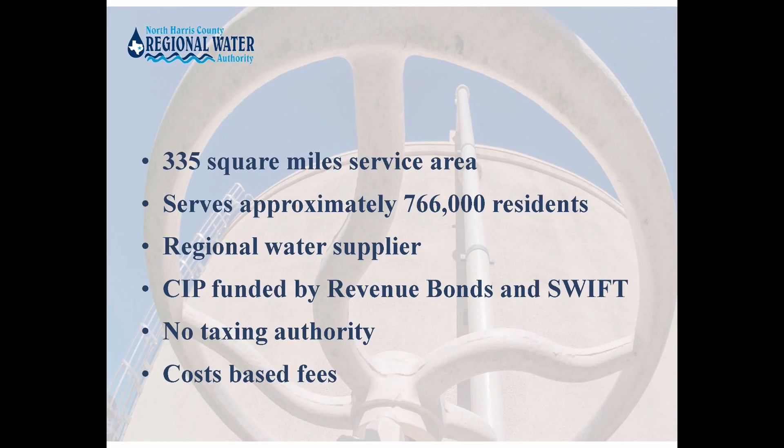So all that said, people still ask why we need you guys. And we didn't ask for this, and we are perfectly fine using our own wells. And now you come in and all of a sudden we start paying, in addition to our mud groundwater pumpage fee, we start paying your fee as well.

Why? Well, have you heard unfunded government mandate? That's why. And the state in 1975 created this entity called Harris-Galveston Subsidence District. That agency is created for the sole purpose of regulating groundwater pumpage. So if you have always used the groundwater, things are gonna change. Well, things already changed since 2010.

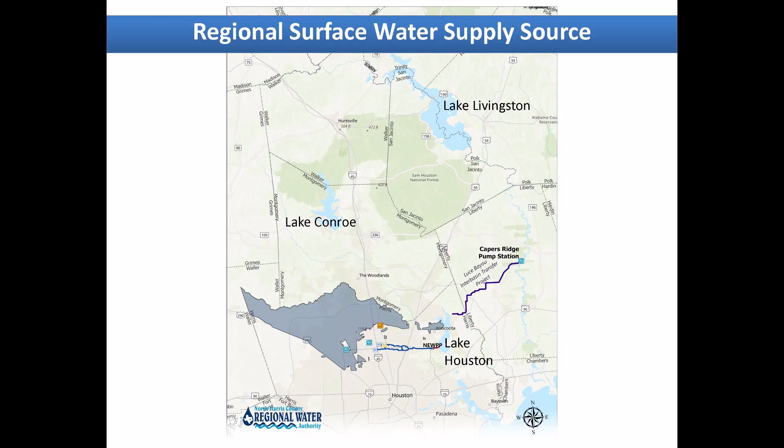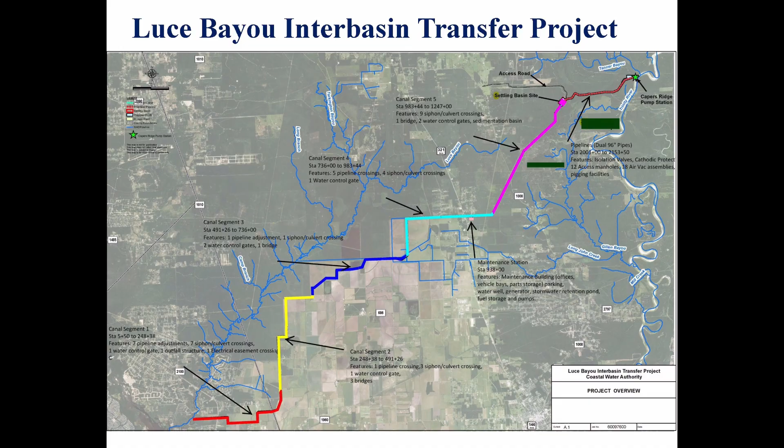The Northeast treatment plant expansion cost is $2 billion.

I also want to point out, if you're talking about people not happy about having to use surface water, imagine the people who live around Lake Houston. They have a beautiful lake, and now all of a sudden this thing is stuck in the middle of the lake, and their boats have to go around outside of what we call the safe zone. So imagine how many unhappy residents there were around Lake Houston when we built this.

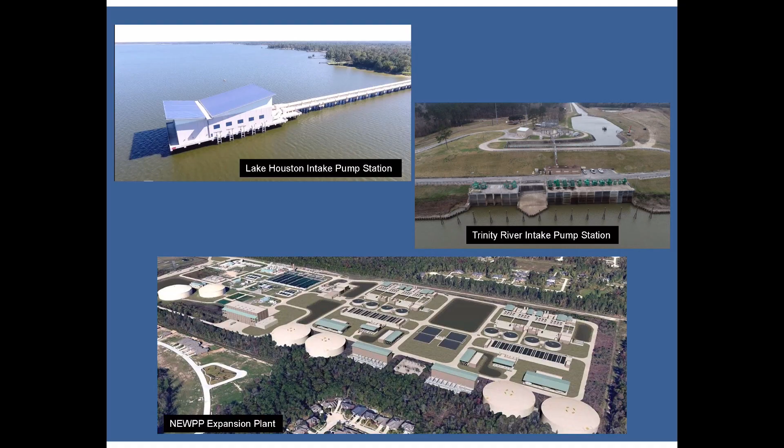Once you build the plant and have the raw water treated, you still have to convey the water from that treatment plant, which is on the east side of Harris County, to where we are, which is the central and west part of Harris County.

So North Harris County partnered with City of Houston to build what we call the Northeast Transmission Line. Remember, there are other partners - the West and North Fort Bend partnered together and built their own separate transmission line. The City, North, and Central built this Northeast transmission line together.

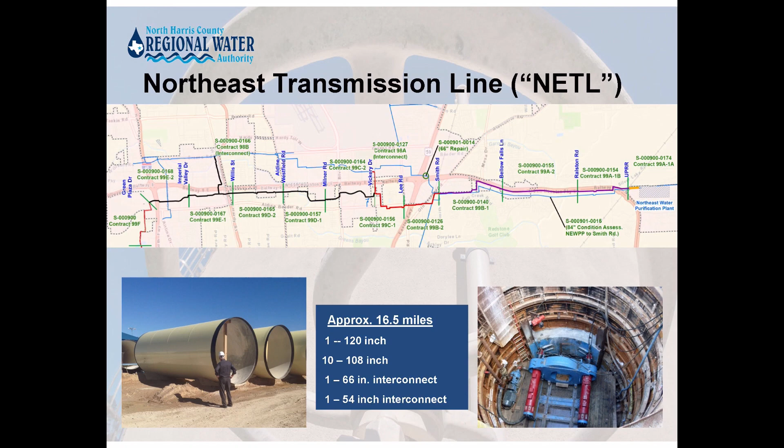There are 13 segments - I don't know if it's large enough for you to see, but the first section is a 120-inch, very large pipe. The next 10 segments are 108-inch pipes. Then one segment is 66-inch and one segment is 54-inch. All huge water lines.

Once the water gets to the end of the transmission line, it enters the North Authority service area. But we have to build water lines, which we call the distribution system, to send water to each individual MUD customer. We are the wholesaler, not the retail water provider, so we send to the MUD, and the MUD provides service to retail customers.

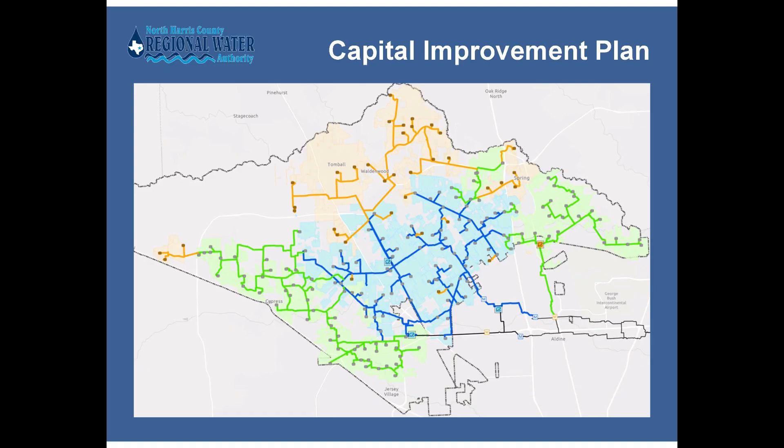Since this particular town hall meeting is targeted for people who live in this particular area, we have maps - two maps actually - showing what we have built to specifically serve you guys.

This one is what we call Project 31, which I know means absolutely nothing to you guys. But if you live in any of those MUDs, I don't know if you can see any of it - no, there's no way you can see that.

Timber Lake, and I can't even read on my page. Correct, so never mind, let me help you there.

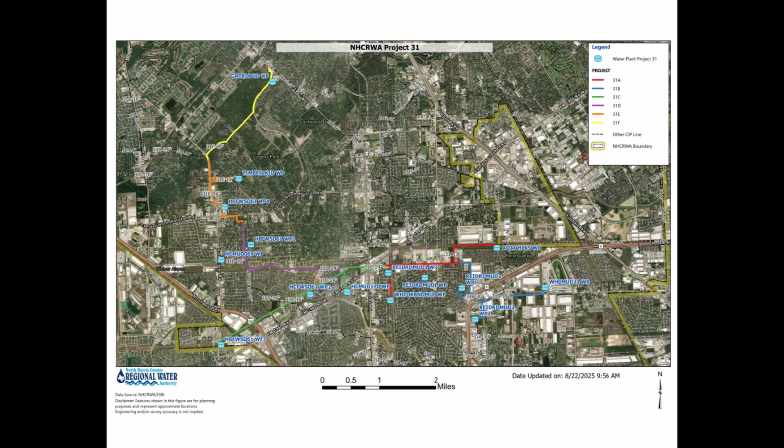Harris County Fresh Water Supply District 61, Timberlake, MUD 69, Harris County MUD 70, Harris County 168, Harris County MUD 222, Harris County 248, and Reed Road 2. If you live in any of those areas, the water line under Project 31 is specifically designed and built for you guys. The activities are already completed by now, but if you want to know exactly where they are and what size, please contact our office. We can provide you all the information you need.

Next page, please. Here are some more MUD districts, under what we call Project 35. They are also designated to serve those MUDs on this map. Jerry, can you help me with those MUDs as well?

I mentioned some of those earlier. Northwest Harris County MUD 29, Northwest MUD 9, MUD 10, MUD 11, and so on, and Reed Road. This is really kind of in the 290, 1960 area in Cypress. Thank you.

As you can imagine, to build a huge water line and canal to convey the raw water from one lake to another, which you also saw on the map earlier, it's a long, very long distance, 23 miles to be exact.

And then it's treated at the Northeast plant, and we build the transmission line to convey it from the plant to us. We also have to build what we call the repump station. Why? Because when the water is conveyed from the Northeast plant to us, the pressure is already gone, so there is not enough pressure to serve you guys. So we have to build a pump station to put the water into the tank and repressurize it. That's why we call it a repump station.

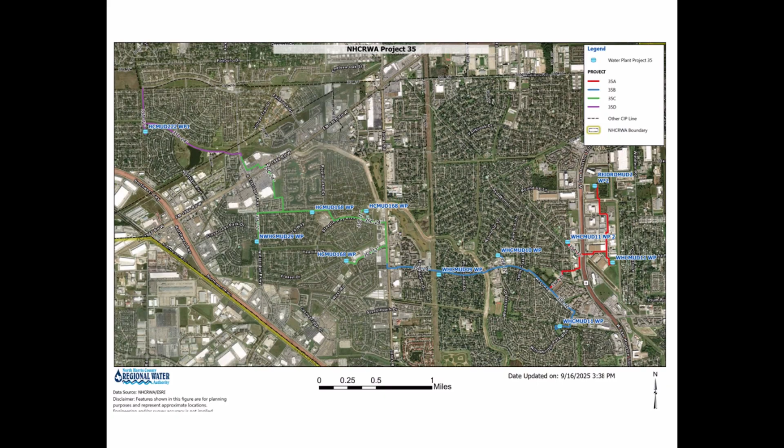So we have to build those repump stations, and we have some more to be built to serve future need, all for repressurizing purposes. Next, please.

So here's why you're paying those fees. For the 30% conversion to meet the 2010 regulatory mandate, we spent approximately $500 million. After that was done, we immediately started the 60% conversion, and we have so far spent $2 billion. We still have about $900 million of projects to be built.

After that, we will immediately start the 2035 phase, which is the 80% conversion. That will cost about $2.1 billion, plus the $900 million, so total $3 billion to be spent. Those dollar amounts are just huge, right?

That's why we have to spread the cost out among everybody within the service area. There's a question always asked: we're paying fees, but we're not getting any benefit because we're not receiving a drop of surface water. Why? Here's why. Because the rule applies area-wide, everybody is subject to it. If you are not using surface water, that means someone else is using surface water so that you can afford the privilege to continue using groundwater.

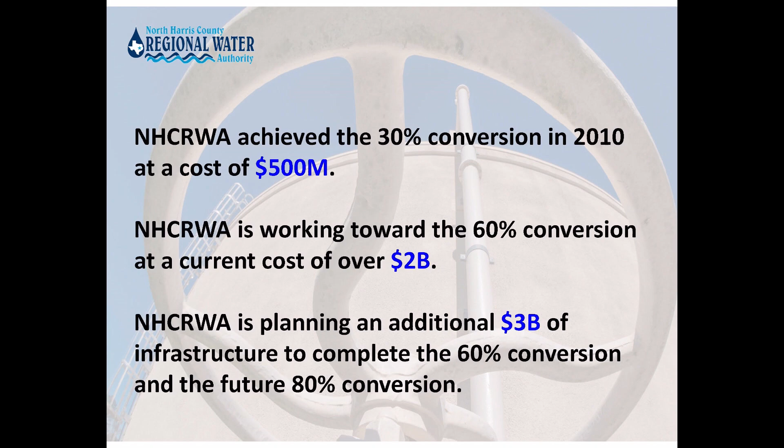So to be further broken down, next slide please.

The project costs: you can see the Luce Bayou project, that's for the raw water projects. The authority share, those numbers you see there is only the North Harris County Regional Water Authority share. The total cost is much more than that. Luce Bayou, our share is about $186 million.

For the Northeast Plant expansion, the total cost I mentioned earlier is $2 billion, and our share is 35%, which is approximately $687 million. The Northeast transmission line is $245 million, which represents about 55% of the cost. Then the transmission line by the authority, we have to build the line from the east side of the boundary to the plant, that costs $319 million.

And then the distribution system cost is $1.4 billion. So those projects are clearly very expensive. The total for the conversion for the 60% is about $2.9 billion.

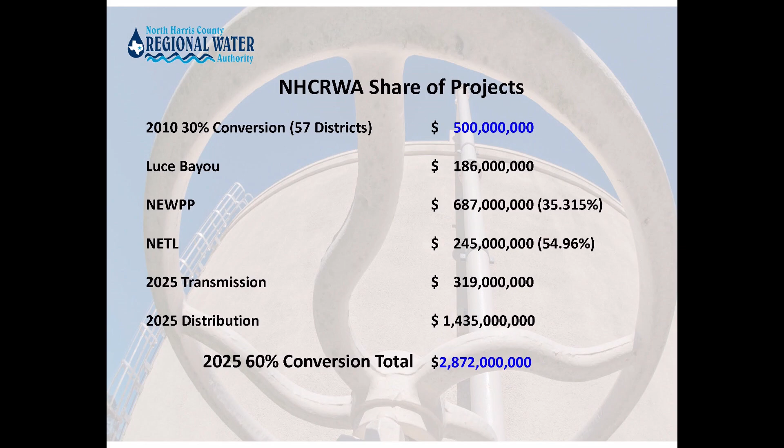So now we get the water to you through all those systems. We have a contractor to operate the system for us, which is Inframark. So at this point, I'd like to turn over the presentation to Brian, who is Inframark's operation manager for us. Thanks, Jim, appreciate that.

So we're going to talk a little bit about what to expect in the sense of the water. As Inframark is the operator, we're responsible for getting that water from the City of Houston out to your neighborhood. We'll be making those connections soon. So if we can move on to our next slide please.

So this is an example of a typical water well. This is what we would call groundwater. You have water sitting underground in a lot of rock. It's naturally filtered by the earth, and the majority of the water supply in suburban Houston was groundwater up until 2025. With that 60% conversion, we're moving to use more surface water. Most of the water you're going to get on the north side of Houston is going to be from the Evangeline or the Jasper Aquifer.

Typically you see these plants supplying a neighborhood. They take the well and drill it about 500 to 1,500 feet underground to access these aquifers. Like I said, it's naturally filtered by the earth, might have a little bit of alkalinity in it, but because it's naturally filtered, the treatment is mostly done underground. So we pull it up, add one or two chemicals to it, and that's it. Very easy. Unfortunately, we're using a lot of it.

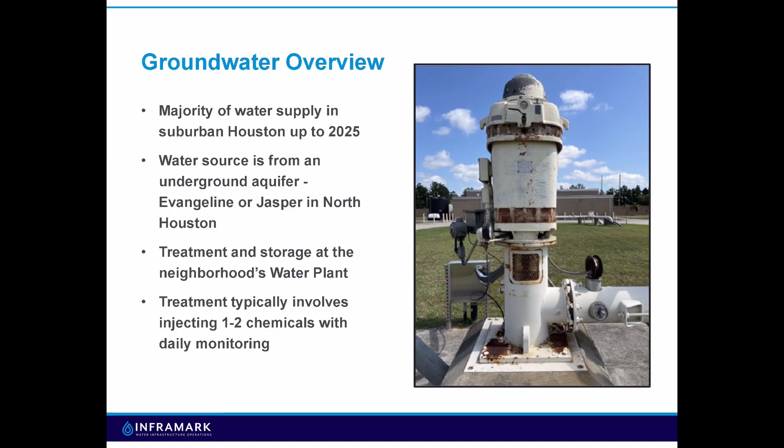A lot of people, like the city of Houston, are moving here, and so we do use a lot of water. We need an alternate source, and that brings us to surface water. So the next slide please.

So what's the difference with surface water? Well, it's much more complicated to treat. It comes from Lake Houston. Different type of disinfection, different type of chemicals are used. When I say more complicated, we can't just pull it out of the lake, add a couple of chemicals, and then send it across town. You have to go through a long treatment process. There's a diagram in a couple of slides that'll kind of go through that.

But it requires a lot of monitoring, a lot of sampling, a lot of effort. And instead of just supplying a local neighborhood, you're moving it from the northeast side of town all the way across to neighborhoods like this. So the next slide please.

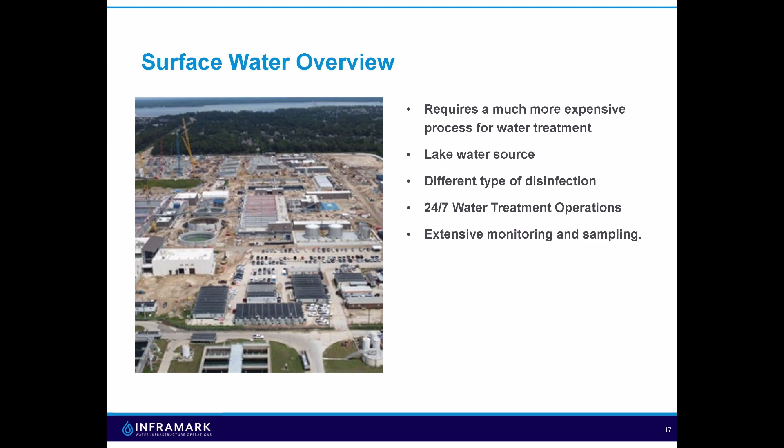This is kind of just an outline of the process. Probably hard to read up there on the screen, but our process to get the water from the lake to you is that the City of Houston treats it at the Northeast Water Plant. They do all the disinfection, the treatment, the filtration. They put out safe drinking water.

They then pump that to the North Harris County Regional Water Authority, where it goes to our pump stations, through our metering stations. Our operators check that water again and make sure it's continually safe to drink, and then we send it out to the water receiving facilities, which is what we call your neighborhood water plants, where it is checked again by the operator that operates in that neighborhood. So we are conveying that water from the city on the northeast side all the way to the neighborhood across town, following these steps. So the next slide please.

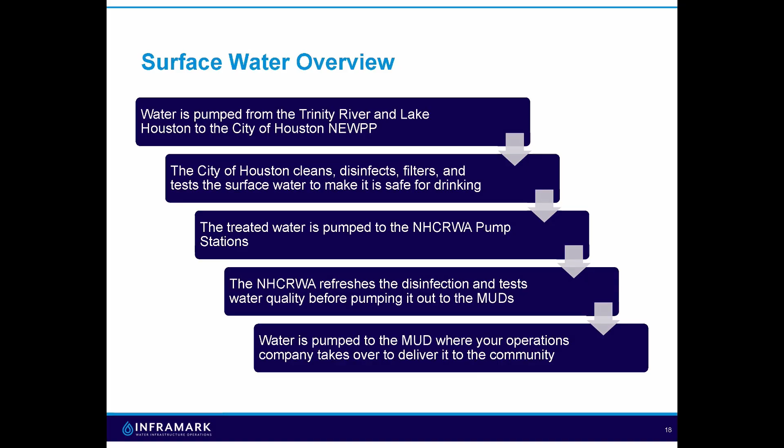This is going to be a diagram of the Northeast Water Plant and their treatment process. Probably a little bit hard to see, but a basic overview without getting too scientific: you have your lake, you pull water out of it, you inject a few different chemicals. We can't go from one or two anymore, I think there's five or six listed on this page. You mix it up with the chemicals really quickly, and then you let it sit, and the dirt kind of sticks together and all settles out, and you have kind of a clear water, but it's not done being treated yet. You've got to disinfect it now.

So the city of Houston, at their new water plant, they use ozone. Now, ozone is kind of like the rock star of water for an operator because it's flashy, it's expensive, and we're all impressed by it because it's a process where you shoot a lot of lightning through oxygen and create ozone.

Ozone has to be generated at the water plants. You can't just make it at a plant and then ship it, it has to be done on site. So you put it into the water, and ozone is by far one of the most effective chemicals for disinfection because it enters the water, does its job, and then disappears. It doesn't stay in the water. It destroys the cell walls of anything organic inside the water, and then it's gone.

So the water has been treated, everything in there is ready to be filtered out, and then they have to add disinfectant to move it along its way. That's to make sure it continues to be safe on its journey across town. So they treat the water, go through this whole process, put it in the tank, and then it gets pumped to us.

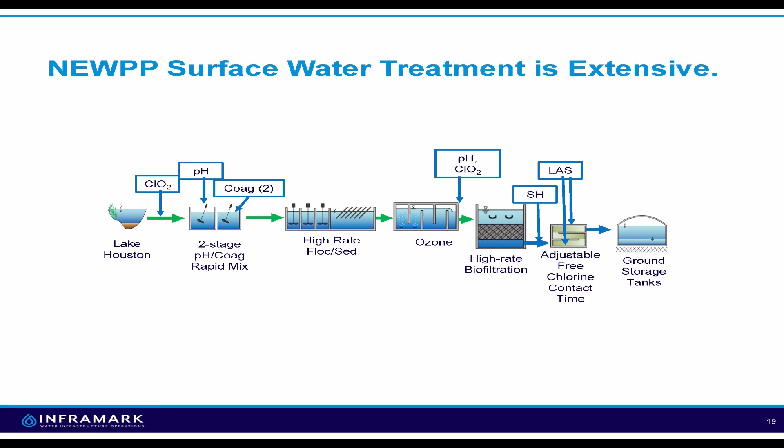So the next slide here is going to be some authority facts. Within the boundaries of the authority, we have 150 participating districts within our groundwater reduction program. The whole area, which you've seen on the map, covers about 766,000 people. And as June was saying, we have about 144 million gallons per day of available surface water to pump out to our system. As we add more connections and expand, we'll be using more and more of that water.

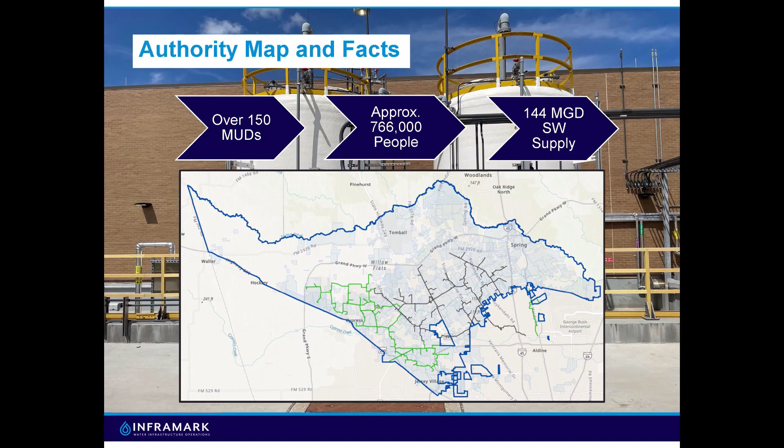Next slide please, a rundown of our North Harris County system. We have 2 City of Houston metering stations where we first receive the water from the city. From those metering stations, it goes to our 3 water pump stations. June was talking about the Jimmy Schindewolf pump station, which used to be called Spears Road. We have the Alan Rendl pump station, which is on the newer side, and the Louetta pump station. All 3 are responsible for conveying that water, repressurizing it, retesting it, and getting it out to the neighborhoods.

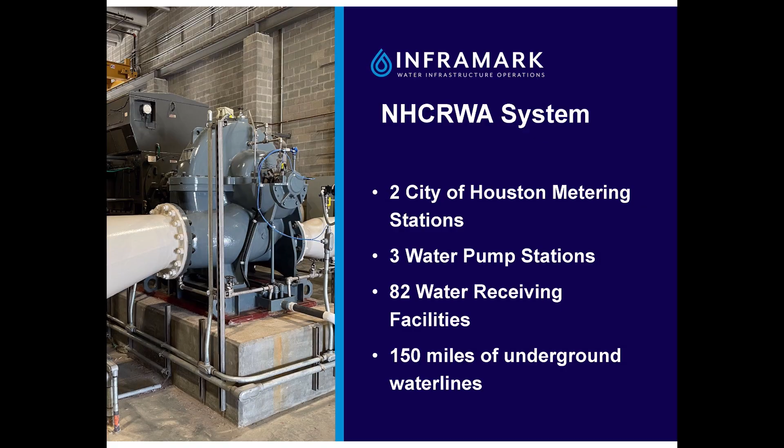By the end of this year, we're going to have over 80 water receiving facilities and 150 miles of installed water line in the ground. June was going over how some of those pipes are 10 feet in diameter, 9 feet in diameter. There's some big pipes out there, all the way down to 12 inches. A wide range of different pipes, and just a really impressive system to get that water from one side of town to the other. We have some pictures on the next couple of slides.

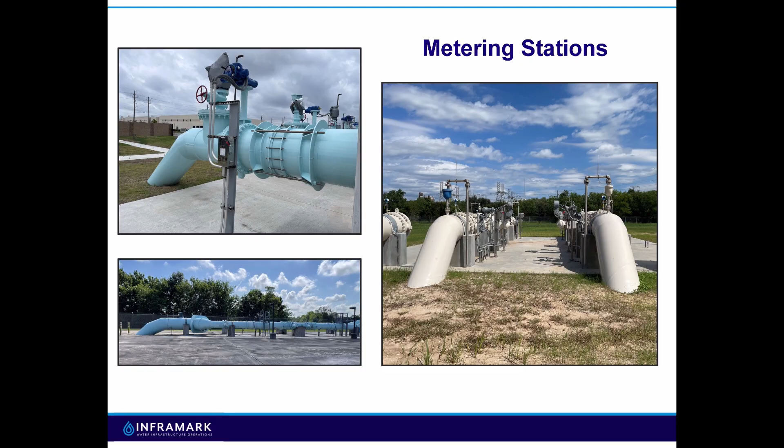This is an example of a metering station. Like I said, we first get that in from the city. It's the first point where it enters our system, and we can start testing and treating the water. So a couple pictures there.

So Schindewolf is designed to withstand a storm, and it's very likely that during a hurricane, we probably have somebody monitoring these because we just want to make sure everything is going the way expected to.

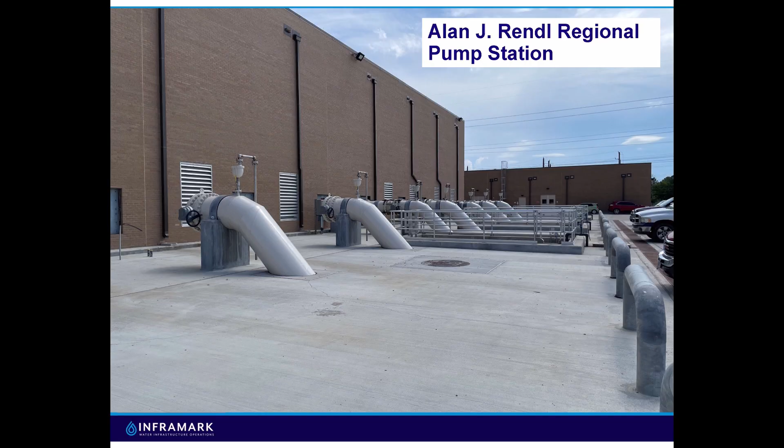Next slide please, it's going to be just a picture of the new pump station off of 249, Alan Rendl. This is standing in the parking lot. These are the lines from the booster pumps out to the main distribution system.

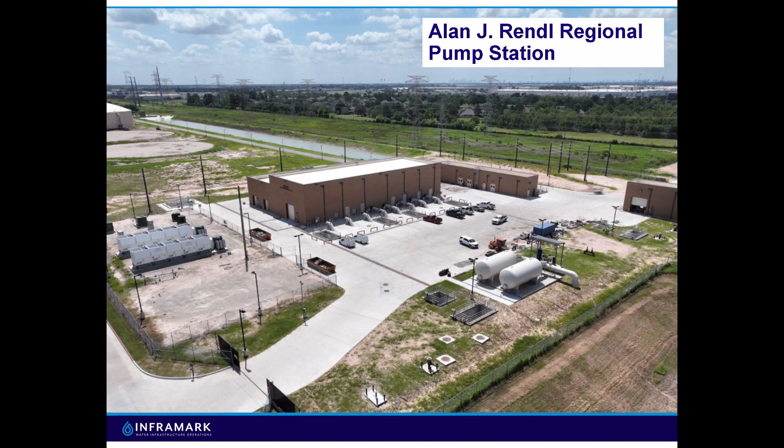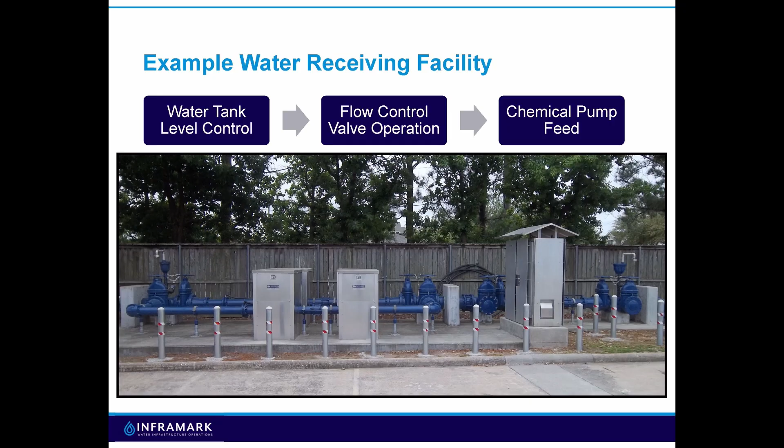So let's talk a little bit about what these changes are going to be, what's coming. This is going to be the changes that you're going to see.

Groundwater, you've been probably drinking it for a long time. It's going to taste different. Surface water does not taste the same as groundwater. I'm not going to say one's better than the other. I personally prefer North Harris County surface water - I have to drink it every day, all week, so that's what I prefer. But it's not bad, it's not good, it's just a change. So you're going to notice that the water tastes different.

It's just as clean and safe as always. There are multiple steps where operators are checking that water, so one's not safer than the other. It's just a lot more hands on the surface water side - a lot more people making sure that water stays safe.

You're going to see more hydrant flushing from your local operator. It's just part of the process. When we make the connection, they want to move that water through your whole system, so they're going to be flushing a lot. The change in disinfectant type requires that we flush more. We have a developed program for all that. So you may see more operators out there, but it's nothing to do with anything negative - it's just what we have to do when disinfection is changed.

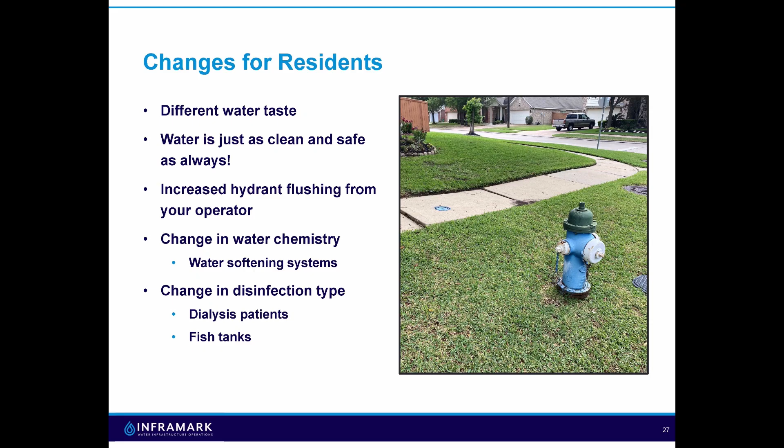And then the same thing with fish tanks. I had some fish that I brought down when I moved from Central Texas back to Houston, where we didn't have a great residual up there, and I didn't need to add anything to the water. Well, I brought them back, and I did not add anything to the water, and unfortunately the fish didn't make it. And I learned, as an operator, that you have to take the chlorine out of the water before you put your fish in. So chloramine is more resistant, more resilient - it stays in the water longer. So you want to make sure your fish are going to be okay and take the chlorine out if you're dealing with that.

Changes for some of you operators out there - you're going to notice this in your district. With the change in water chemistry, obviously you're going to have to increase your flushing program. There's going to be more testing, and I mentioned the alkalinity - if there's a big change, you may have to make some adjustments over at the wastewater plant. We don't want you to completely stop using your water well.

We want you to run that on a schedule, maintain your chemical pumps. Also, the valves in the system: some are in 5-foot manholes, and some are in the same boxes that the Mud District uses for their valves. We generally write NHCRWA on our valve boxes, so you'll notice the difference. If you're out there doing a valve survey, make sure they stay on the district valves and don't touch the North Harris County valves.

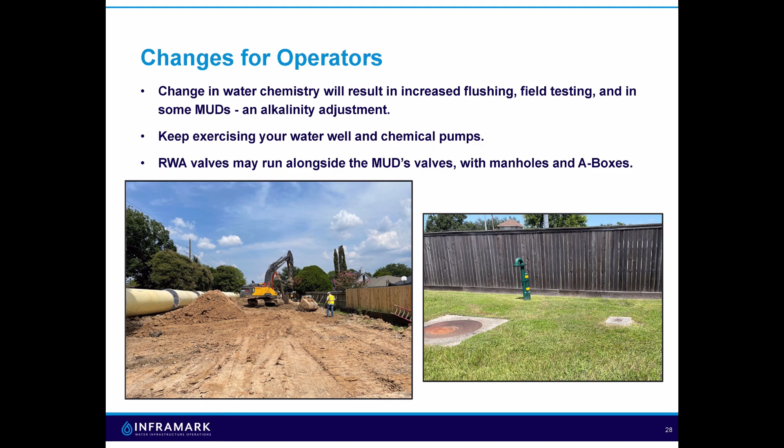That's all I got. Okay, we're going to get into general discussion now, and we'll go through some topics, maybe dig in a little more on specific issues you might deal with as a resident. First off, I want to go back to infrastructure - obtaining easements for these transmission lines and all these lines that are coming out. Talk a little about the difficulty of that and how it's done.

Yeah, sure, Jerry. So I can imagine every resident, when someone knocks on your door and says I want to put a water pipe in your backyard, your first reaction would be, no, go away, I don't need that. It's understandable, right? But it's also a necessity. That's why the state created what they call public necessity, and eminent domain power given to the public agency - meaning if the project serves a broader public, individual rights will be curtailed to meet the broader good.